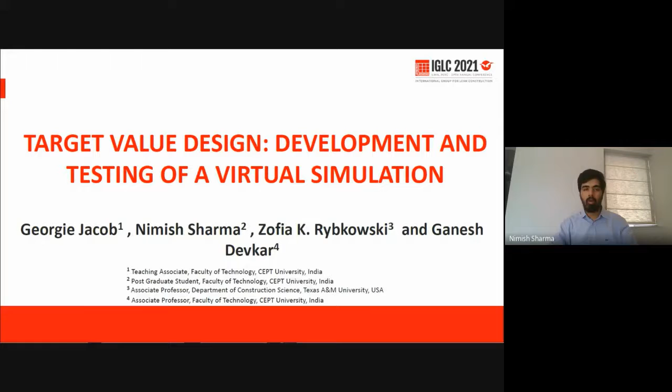Hello and greetings everyone. I, Nimish Sharma, along with my colleague Georgie Jacob, would be presenting our paper titled Target Value Design, Development and Testing of a Virtual Simulation, co-authored along with Dr. Zofia K. Rybkowski and Dr. Ganesh Devkar.

These are the following subsections of the paper, which includes the general introduction about the paper, the TVD simulation, simulation development, simulation testing, post-simulation discussion, and finally the conclusion.

Starting with the introduction, serious games and simulations have been explored since early 1980s by many prominent lean researchers and scholars such as Greg Howell and Glenn Ballard. They have effectively instilled the concepts and principles of lean construction among the participants. But due to the current COVID-19 pandemic, these lean simulations and games that were previously played in person have been largely impacted. Hence, there was a need for an online simulation to teach TVD despite the current social distancing norms present globally.

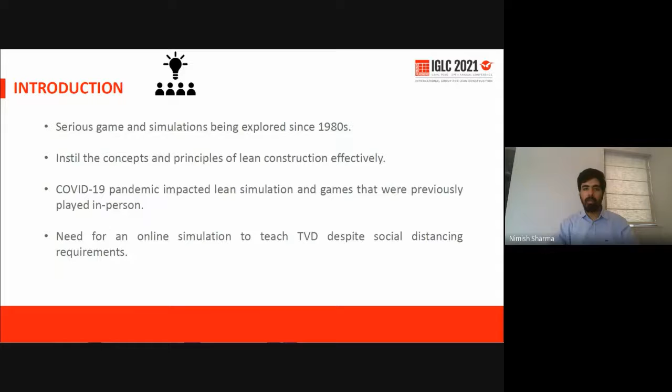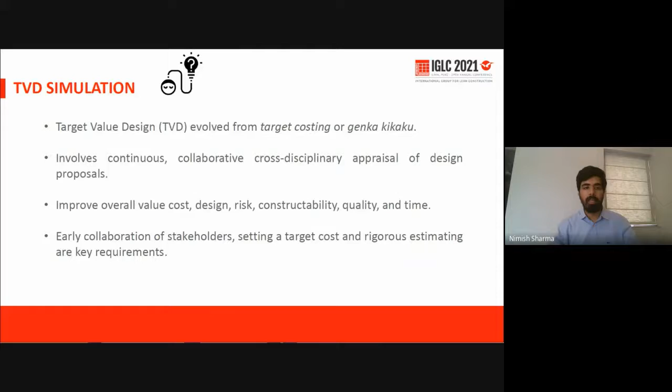So target value design evolved from target costing in Toyota's production system in Japan. It involves continuous collaborative cross-disciplinary appraisal of design proposals. It improves the overall value of the design proposal in terms of key value propositions such as cost, design, risk, constructability, quality, and time. Early collaboration of stakeholders, setting a target cost, and rigorous estimating are the key requirements of TVD. The target value design simulation has been inspired by the Marshmallow Design Challenge game prepared by Peter Skillman.

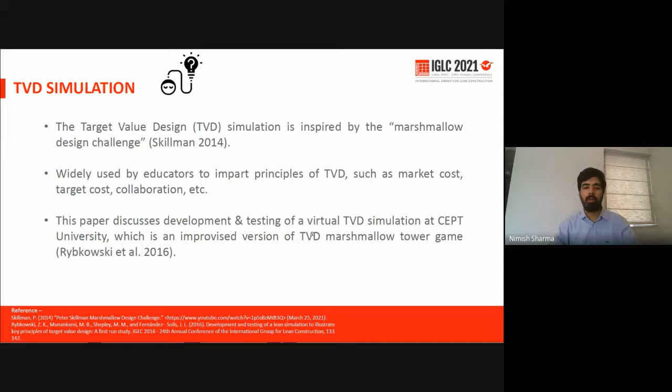It's been widely used by educators to impart principles of TVD such as market cost, allowable cost, target cost, collaboration, etc. This paper discusses the development and testing of a virtual TVD simulation at CEPT University, which is an improvised version of the TVD Marshmallow Tower game prepared by Munankami and Dr. Zofia K. Rybkowski. This simulation involves the design, construction, and costing of a virtual tower. The specification of this tower is 26 centimeter height and 12 centimeter as its base.

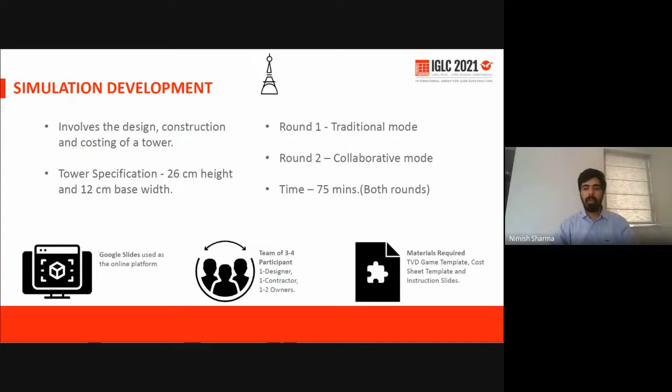It includes two rounds consisting of round one, which involves the traditional mode of development, and round two consisting of the collaborative mode of development. The total time required in both the rounds is approximately 75 minutes. Google Slides have been used as the online platform to develop and test this simulation. The total participants required in each team are 3 to 4, which includes one designer, one contractor, and 1 to 2 owners. The general materials required to play this simulation are the various templates prepared, such as the TVD game template, instruction slides, and the cost sheet template.

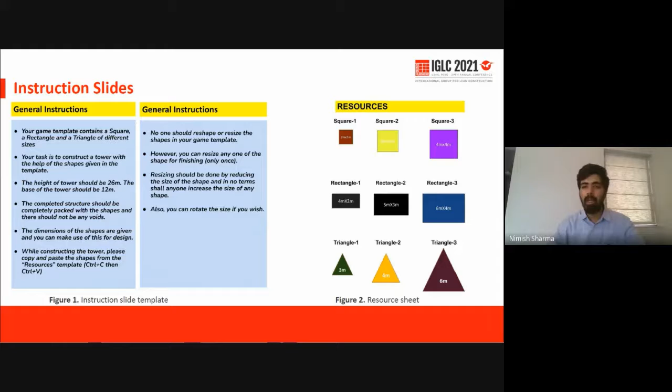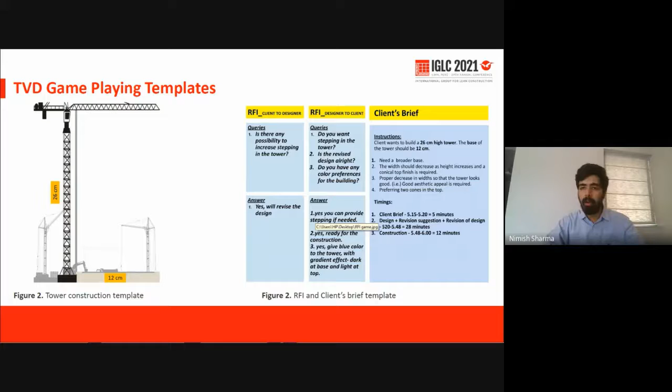The instruction slide provides related information on team composition, role playing, and general instructions for playing round one and round two. It also consists of a resource sheet with various shapes used for constructing the tower. It's followed by the TVD game playing template, which includes the tower construction template, the template for RFIs, the template for uploading the design proposal, and the template for providing the client's brief. Finally, there's a cost sheet template, which consists of a table itemizing the predefined cost rates of each shape, the number of shapes used in the construction of the tower, and the total cost of the tower.

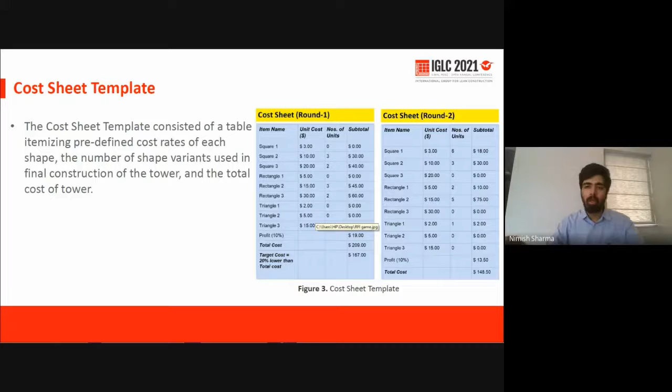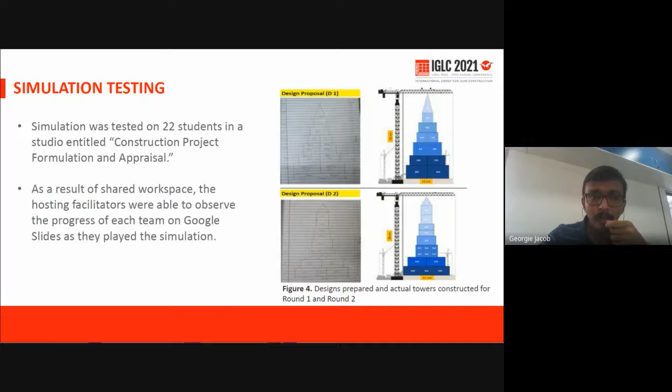collaborative mode. Round 1 was approximately 45 minutes, in which the designer sketched his design based on the client's brief. The contractor constructed the tower based on the designer's proposal. The cost sheet, which was discussed in the previous slide, was not shared till the completion of round 1 to avoid any influence of the cost during the preparation of the owner's brief and design proposal. After the cost calculation, there was a brief discussion to establish the market cost, allowable cost, and target cost. After setting the target cost, round 2 was played and the cost was calculated. This time, since there were no restrictions in communication, the coordination of all teams was enhanced compared to the previous round.

After both the rounds, the Excel sheet with the populated data of each group is projected on the screen in the Meet virtual room. You can see the summary of the data here in this table. C1 is the cost each team's tower came up with in the first round. Market cost is the average of these costs. 20% was reduced from the market cost to get the allowable cost. Each team then declared the target cost for round 2. The cost in the final round, which you can see here, turned out to be less than the average cost for most of the teams.

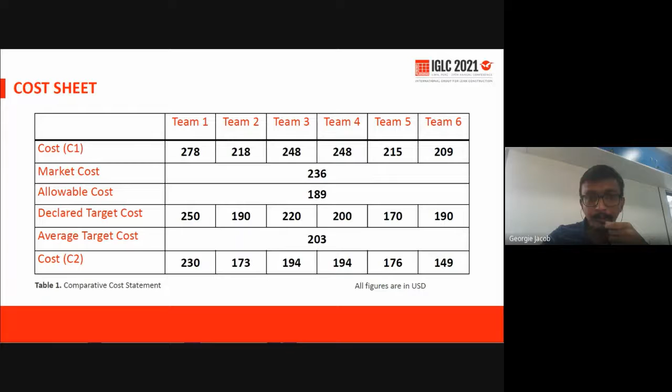Moving to the post-simulation discussion. For evaluating the simulation and taking feedback from students, we chose the questionnaire developed by Munankami and Dr. Rybkowski for the tower game which they have developed. The questionnaire was floated to the students in the form of a Google form with 23 questions in total, out of which we are showing the 9 major parameters here. The students were asked to immediately provide responses to the questionnaire, since learnings and their aha moments were likely still fresh in their minds at the end of the simulation.

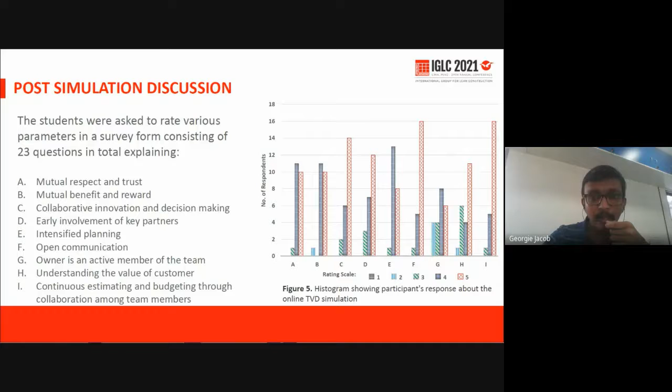The points C, F, and I, as you can see in the slide, were rated higher, which were collaborative innovation and decision making, open communication, and continuous estimating and budgeting through collaboration. Most respondents gave a higher rating for the parameters of mutual trust and reward. Involvement of key stakeholders assisted in a team's development of innovative towers that not only met owners' needs but also lowered the cost of construction. Based on the discussion, it was evident that the simulation was effective in providing a first-hand experience of these TVD concepts. The analysis of questionnaire responses indicated that the concept of target costing was understood by the participants.

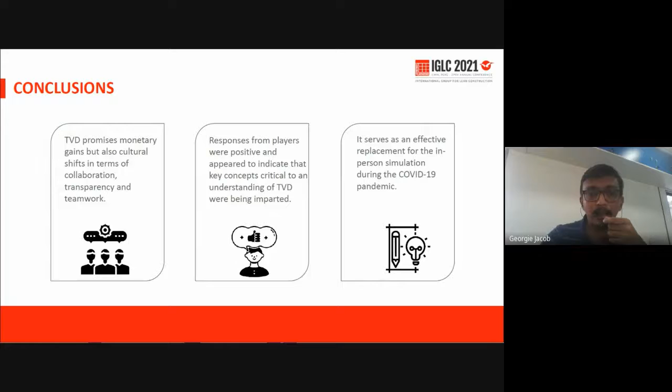So, from the whole simulation, we have concluded that TVD promises monetary gain as well as enhancing collaboration, transparency, and teamwork. At the development stage, it was a little doubtful for us whether this virtual simulation would be as effective as the tower game by Dr. Rybkowski. But the responses from the students indicated that the key concepts for understanding TVD were being imparted. Also, this served as an effective replacement for the tower game during the COVID-19 pandemic.